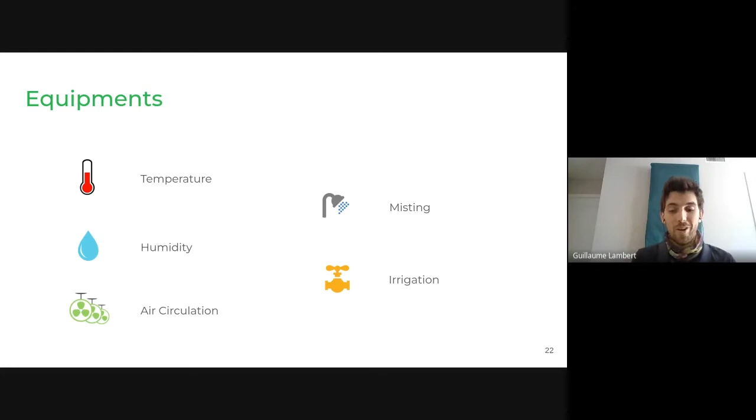So here we have heating devices or furnaces. What we see most are propane or natural gas, but more with carbon neutrality for 2050, there's more and more states that subsidize electrical heating as well. So that's becoming more and more important to know about when you're looking for heating systems. And then biomass exists but is more expensive, so I'm not going to talk too much about that here.

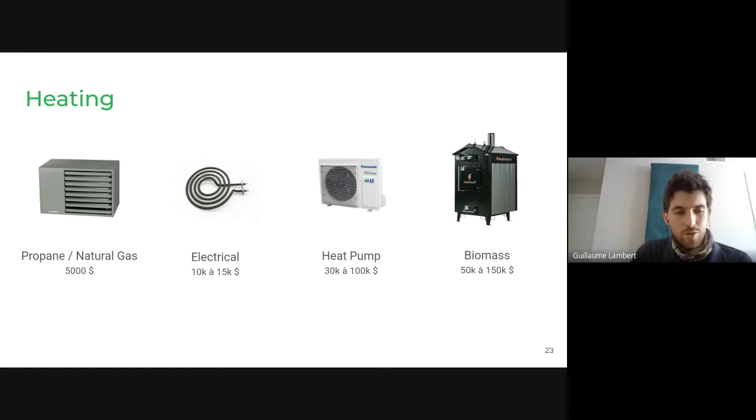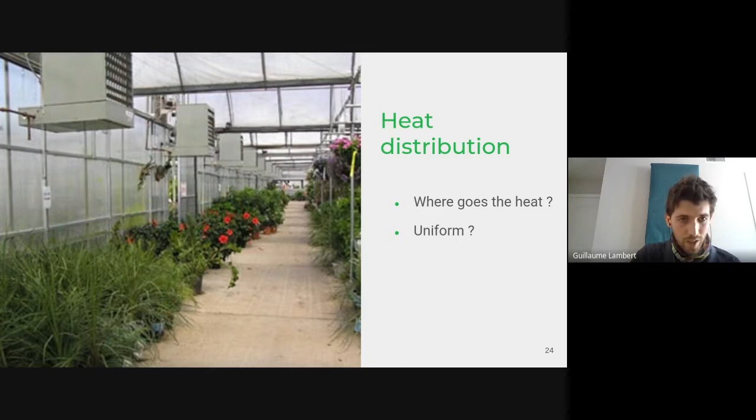The other part of this kind of heater is uniformity in the greenhouse. That's very important, so that you can control efficiently and know when to harvest, and we want every plant to be pretty much the same. With this kind of system, it's hard because it's really localized heat distribution.

Second important equipment is ventilation equipment. There's two types: mechanical and natural ventilation. Mechanical are basically fans that push air into the greenhouse or out of the greenhouse. Not going to go into too much detail here.

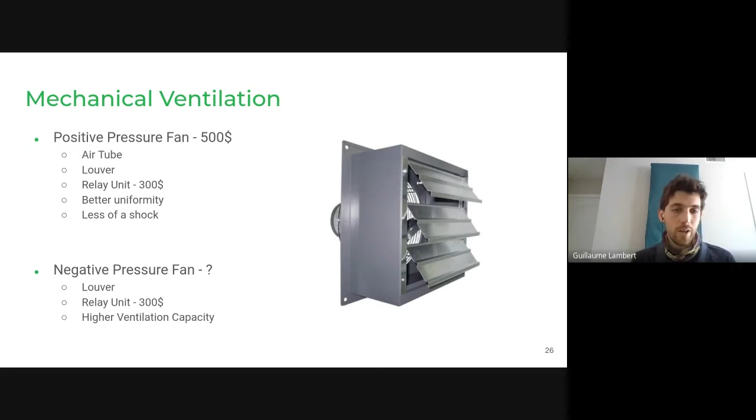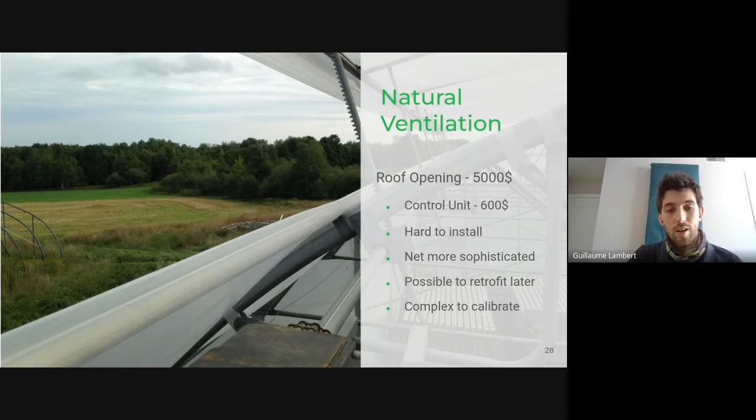Then natural ventilation - what we see most of the time are side curtains. It's a motor like this that will just roll the poly of the greenhouse, creating an opening for the wind to come in. The other option is roof openings like this one, but it's really more expensive and harder to install. But it's easier if you live in a place where there's snow and ice that gets the side curtain stuck or cold at the beginning or end of the season.

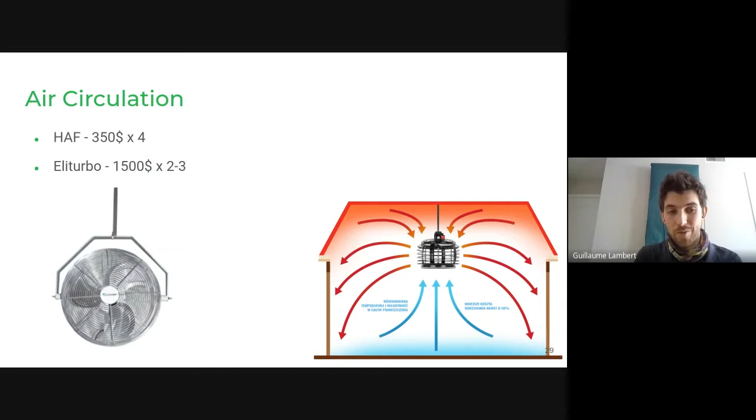After that, air circulation. What we see more often are HAFs, or horizontal airflow fans, which is the one on the left here - typically we see maybe 4 of them in a greenhouse. They're set up in a way where they make the air go in a circle in the greenhouse to make sure everything is as uniform as possible. But there are new systems we're starting to hear about - Eliturbo is a brand, but it's the one on the right here, where it takes the air from the top and brings it back down. So if you have a heater system like the one we saw earlier that's at the top of the greenhouse, this can help maybe. I'm just suggesting you ask your suppliers if you have questions about this equipment, since it's not my field of expertise.

Then irrigation and misting - we have pumps, pressure tanks, solenoid valves. Obviously there's a lot of fittings and other stuff around it. But what I wanted to say is that most of the time, what we do is not automating the pump itself - it's really automating the valve. The pump is set up with a pressure sensor that makes it start the second there's not enough pressure in the irrigation system. So basically we're just automating the solenoid valve. One warning maybe - when you set up your things, just make sure you don't put your irrigation stuff next to your electrical panel, because if there's a leak or something, that could end up with bad problems.

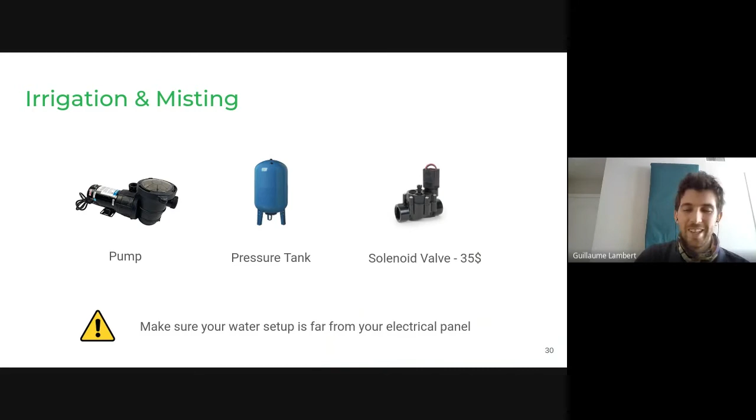Okay, so now sensors. There's a few sensors that we see in small greenhouses. The first one, the most important one, would be the temperature and humidity sensor. Some systems don't have the humidity sensor, or you have to buy it extra.

That's fine, but it's really important that you have humidity monitoring, because that's the big challenge in greenhouses. Temperature is quite easy to control, but it's really the humidity that causes more problems, because it's not as natural to control. Just keep in mind that you need to have a humidity sensor with your system.

After that, there's a lot of things that are interesting to know about the sensor. If it's wireless, it's easier to install, but make sure to know what's the range of the wireless system, and also what is the battery lifetime, because you don't want to change the battery every month. You want less maintenance, not more.

There are two types of sensors. You have electronic sensors, which are cheaper, and you don't have to do anything to maintain them. But the problem is that with time, the humidity sensor is going to drift and become way less precise. And it's less precise from the start as well.

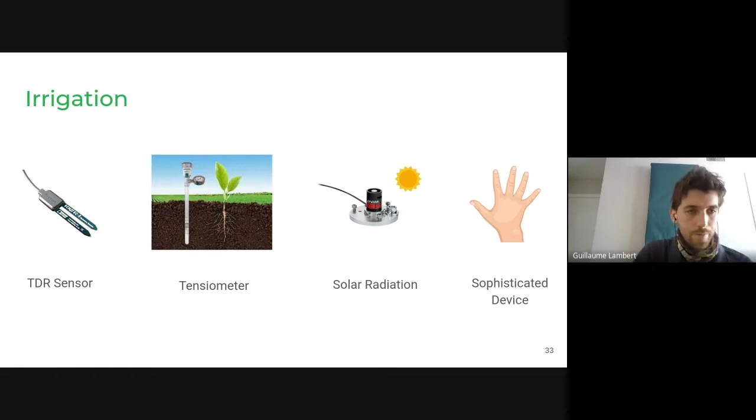I'm going to talk about the different sensors a bit more later. For the outdoor weather sensors, we typically see wind, rain, solar radiation, and then temperature and humidity. Those have different uses, obviously.

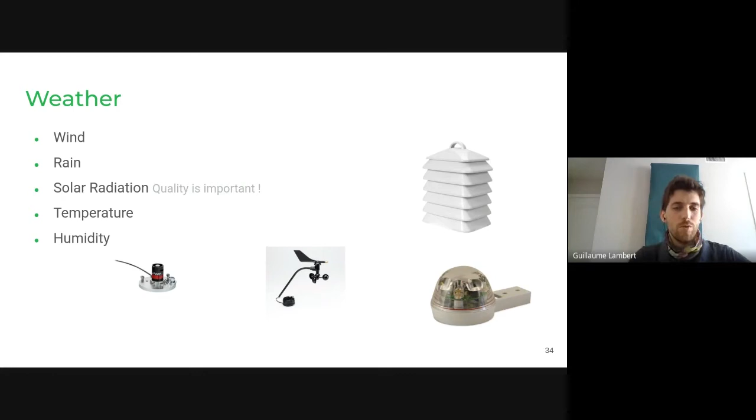But I'm seeing the time pass, and I don't want to go too far into details here. If you have questions, just do not hesitate.

Okay, so we're getting to the heart of the automation, like the brain of the automation. How do we control everything, and what does it look like? For the automation brain, the system you use, here are a few tips to check when you're looking at the options for automation systems.

You want to check if there's remote access. As I said, most systems offer it nowadays, some with subscription, some without. So you want to make sure you have it if that's something that's important to you.

Then I think the most important thing is if the system is easy to use, because we often saw people with super sophisticated systems that were quite expensive too, but since it was too complicated, they wouldn't use it at its full potential, and then they would just lose a lot of money because they're not taking advantage of all the features that they need.

More often than not, people are scared of changing something because they're scared of messing things up. And since it's complicated, it takes a lot of time, so you don't want to get into that. My advice here is to find a system that is not too complex, that is easy to use, and that you won't be afraid to make changes with, because during the season we don't want to always have the same settings.

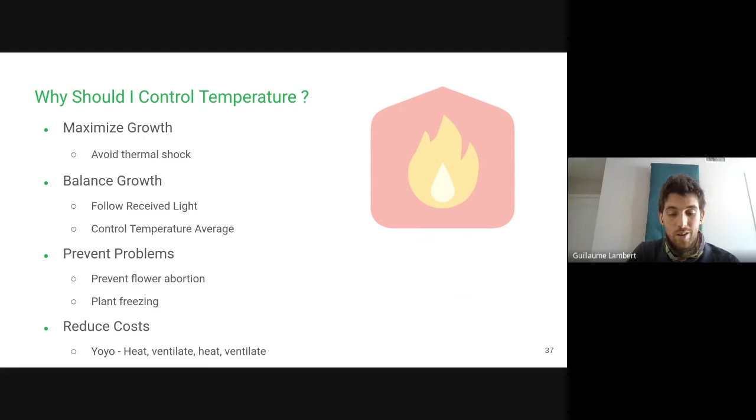Then preventing problems: when we go into extremes, if the plant is freezing, it's going to die. If it's too warm in the greenhouse, the flowers are going to abort, so then we're going to lose yield, and that's not what we want. Ultimately, reducing costs: what we often see with automation systems is it's really hard to find the right configuration. What we often see is a greenhouse that will heat because it's too cold, then get too warm because it's not reactive enough, then cool again. It's going to ventilate to cool down, temperature goes down, then it's too cold so it heats again, ventilates and heats and ventilates, and it's really not efficient - we're losing a lot of energy this way. That's what we want to avoid.

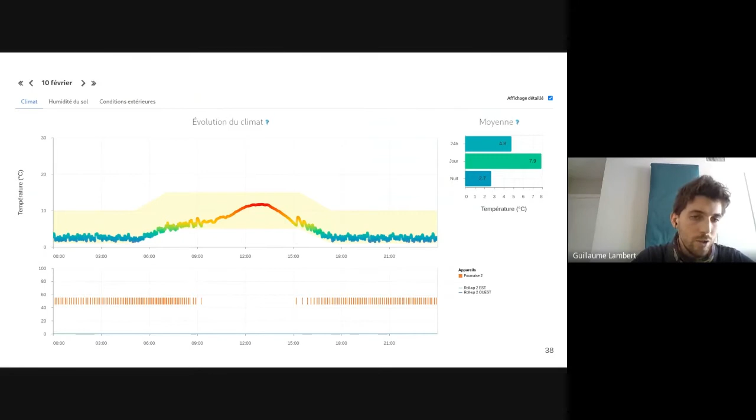Here's an example from one of our customers. On the top part of the plot, you have a yellow band representing the target the farmer wanted - the interval of temperature that was okay for her greenhouse. On the lower part, the orange lines represent the heater running. We can see the temperature was oscillating during the night, and during the day the sun was keeping it in range. The oscillation, to give you an idea, is about 1 degree Celsius - that's a decent precision that we see in greenhouses for a customer.

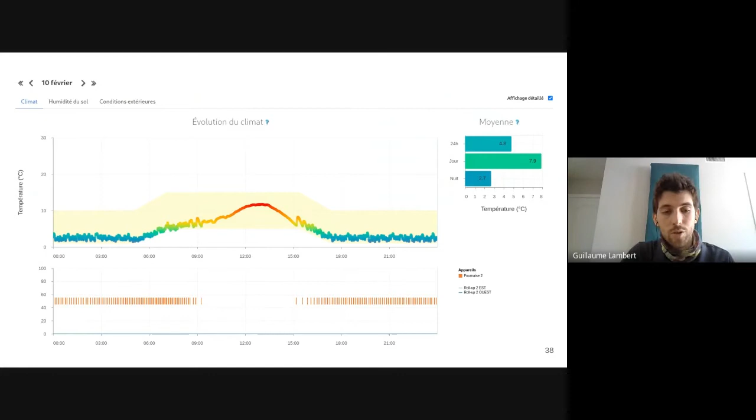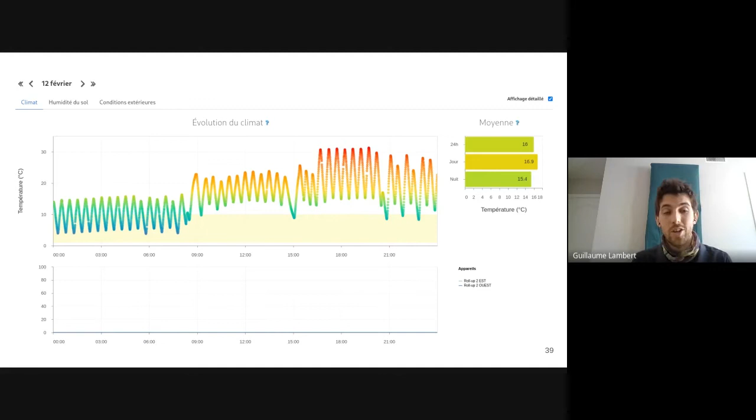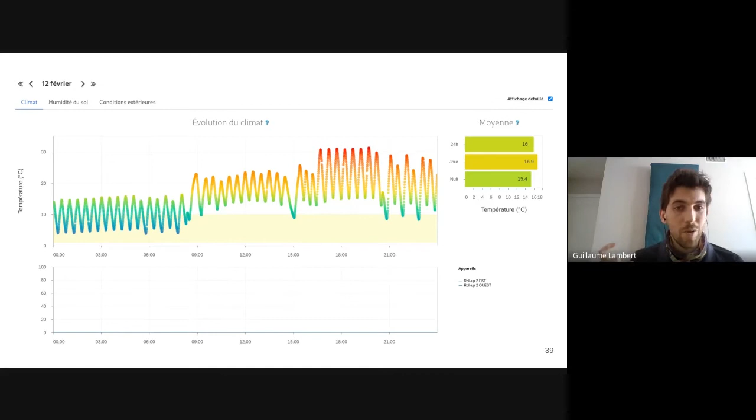I wanted to compare that to the same greenhouse but controlled with a home thermostat, which we often see in greenhouses as well. Here's the difference - the thermostat was on a different target, but we can see it was oscillating a lot. At its worst, in an hour the temperature changed by 20 degrees Celsius, so 36 Fahrenheit. That's a huge temperature swing that plants will suffer from, because when it gets too hot too quickly it causes humidity to drop, so the plant feels super dry, and when temperature goes down, humidity condensates and creates moisture on the plant, risking fungus problems. This big swing of temperature is something we want to avoid in the greenhouse, so we want something more reactive than a thermostat.

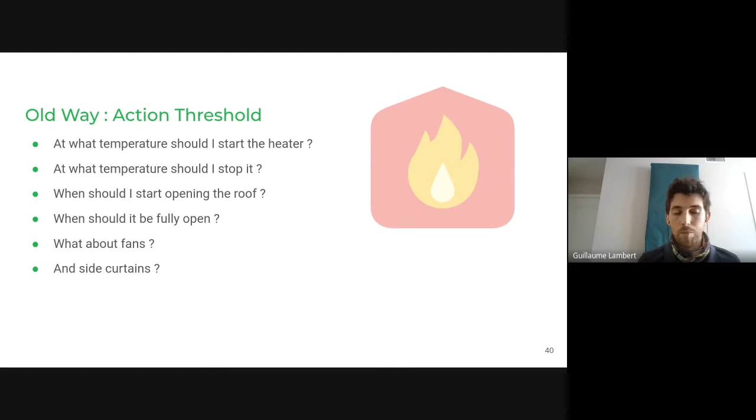Okay, so how do we control the temperature then? There's kind of 2 ways of doing it. The typical way, or I call it the old way, is action threshold. Basically, we give a threshold for every action that we want to happen. For example, at what temperature do we want the heater to start, and at what temperature do we want it to stop? Then we have to figure ventilation as well. So when should we start opening the roof, and when should it be fully open? What about the fans and side curtains? So it's a lot of questions that we have to ask on how we should control the equipment so that we'll get decent temperature.

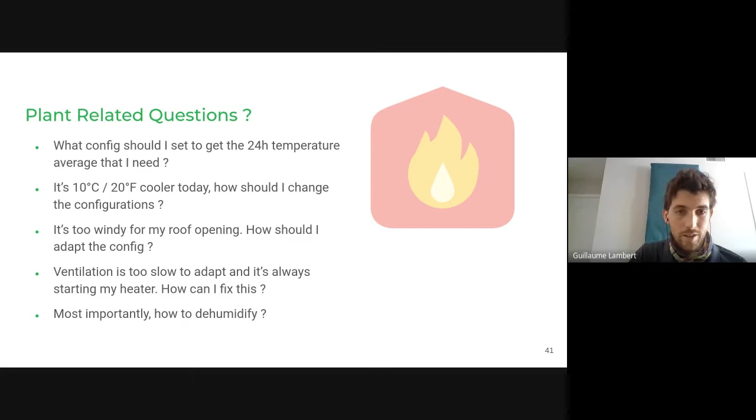And then there's another layer on top of that. So what config should I set to get the 24-hour average that I need for my tomatoes, for instance? And if it's 10 degrees Celsius or 20 Fahrenheit cooler today, how should I change the configuration so that I will avoid doing the yo-yo I was talking about earlier? And if it's too windy and I have to block the roof, how should we adapt the configuration so that the temperature is going to be maintained properly? There's a lot of questions there that farmers have to ask themselves.

That's what we faced when we were working on the system in the early days. We were in the greenhouse doing a lot of tests, trials and errors, and we realized that doesn't work. It doesn't make sense that every farmer has to go through all those trials and errors. It's just taking too much time, and it's changing all the time. So it's not a good way of doing things. That's when we realized that we have to find some other way of doing it.

And that's when we came up with the smart targets system. So instead of having to tell the system what every piece of equipment in the greenhouse has to do, it's more about how we just give the system a target, and then the system will figure out itself how to use the equipment. So the goal here is to put as much expertise in the system so that people don't have to figure things out themselves and lose a lot of time in trial and error. And with that, there's a lot of optimization that could be made as well. So that's the second way.

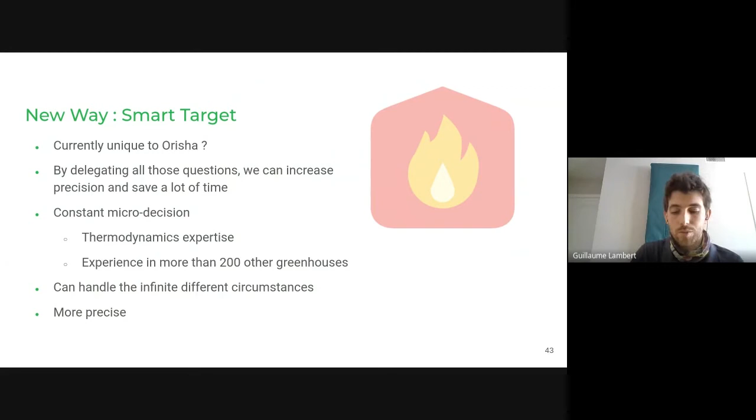That is smart targets versus action thresholds. So how can we save more time while automating the temperature? Well, avoiding trials and errors, as I just mentioned, we don't want to have all those questions to answer. And then, as I said, the temperature has to follow the light received by the plant. So if the system allows us to follow that without reconfiguring every day what we want in the greenhouse, then that's another way to save time.

And ultimately, if you have some constraint on your equipment, so if you don't want the roof to fly away because it's too windy, then you can use a sensor, like the wind sensor, to automatically close it when there are storms.

This is very important, and no matter what system you use, there's always a risk of failures. And if it happens, you don't want to lose your crops, obviously. So an easy way to protect crops from the cold is to just plug a home thermostat in parallel on your heaters. As I said earlier, it's really not precise, but if your main system fails, it's going to keep your plant alive, even though the growing conditions aren't going to be optimal. This is really a cheap and completely redundant way of protecting your crops, so I really highly recommend it.

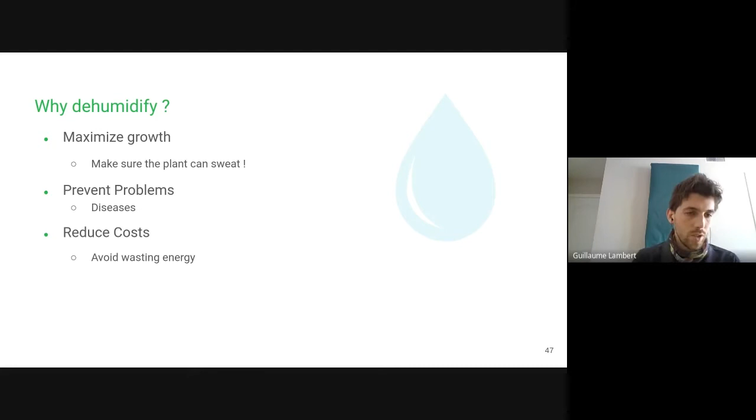The last one is reducing costs. Once again, since we control it with heating and ventilation, we don't want to use too much energy for nothing. We want to avoid wasting energy, and there it's the control logic that will affect it, and that's quite tricky.

First thing to know with humidity control is that we don't want to use the relative humidity, which is in percentage. That's the humidity that we used to. So if it's 80% or 50%, that's what we as humans used to talk about humidity in this form.

For plants, it's different. Plants don't feel the humidity the same way as we talk about it. So relative humidity is no good, we don't want to use that. We want to use humidity deficit. Maybe there's something else you might have heard of, which is vapor pressure deficit. Both are good, but I'm just going to talk about humidity deficit, but the same principles apply to the other one too, called VPD. Maybe people have seen the abbreviation somewhere. Humidity deficit is going to be in grams of water per cubic meter.

If you're not using the plant language, the problem is you're going to either need to sacrifice the plant needs, or you're going to need to constantly change the humidity configuration, because relative humidity depends on the temperature if you want to know what the plants feel. So you always have to do a conversion in your head and on the system. That's something you want to avoid.

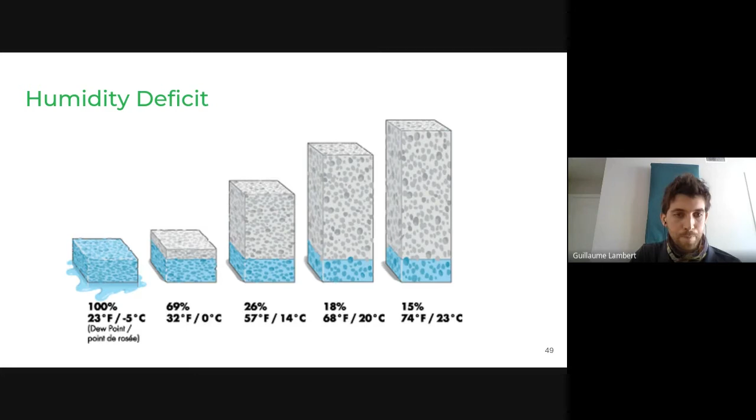So once again, there's kind of two ways of doing it. The first way, what people were doing before, was doing overrides—either manually or some system allows you to create overrides in the configuration.

So what people were doing was just: we open ventilation, we start ventilating either with fans or with natural openings, and we heat at the same time. The goal is to expand the sponge and bring in air with less water in it.

So either people were doing this once at sunrise, or they were programming their system to do pulses—a small amount of time heating and ventilating, then waiting, then starting again. This feels like we're losing a lot of energy when we heat and ventilate at the same time, which is true.

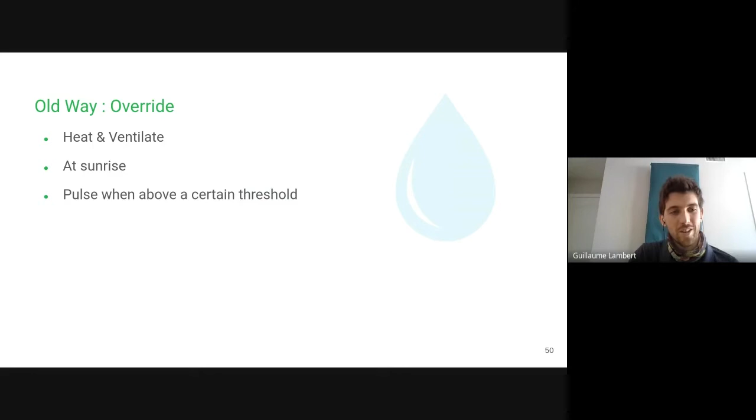But the output you'll see on your yield is really worth it, because you're going to avoid a lot of problems with diseases, and you're going to increase the capacity of the plant to grow. You'll avoid the plant just shutting off and stopping growing.

When we control that manually, what's complicated is: if we want to be efficient, when it's more humid outside than inside, it's kind of hard to follow whether we should ventilate or not. If it's too hot or too cold outside, it's going to affect the plant—the temperature of the greenhouse can become too low or too high. What do we do in these cases?

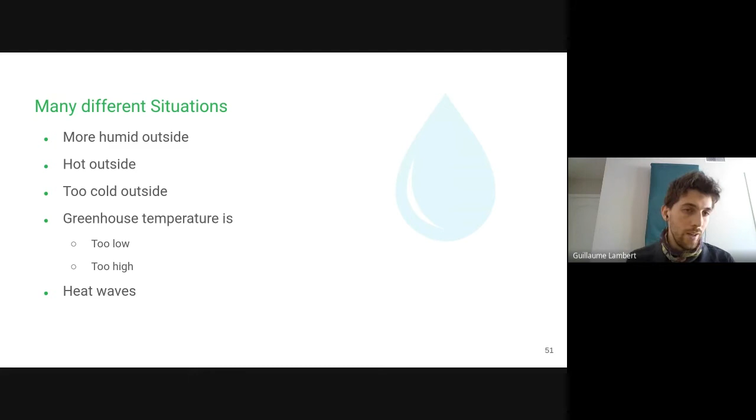And then when there's heat waves, it's hard to dehumidify, and what should we do then? There's still a lot of questions. Maybe the biggest one is: how do we control temperature and humidity at the same time, since they're interdependent but use the same equipment?

So the second way, instead of overrides, you can use the smart target approach—basically delegating the complicated stuff to the system, then making micro decisions based on thermodynamics and experience developed on a lot of greenhouses. That's the cool thing with this approach. I think we're the only one doing that right now, but most likely other companies are going to pop up with similar approaches.

So how much time do we need to adjust the system and control humidity? I'd say you have to change things anywhere from often to never, depending on the system you use. If your system is using relative humidity—percentages—you're going to need to change it a lot depending on the temperature in the greenhouse if you want to do it properly. It's going to take a lot of time.

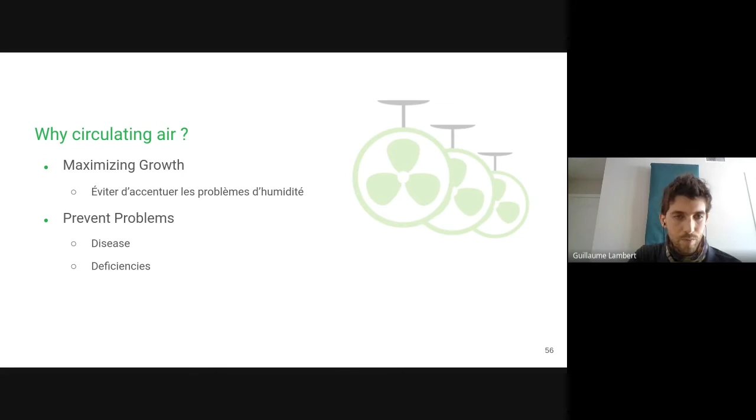If these pockets are too humid or too dry, the too humid pockets stop the plant from sweating, causing deficiency problems, especially with calcium and another one I'm forgetting right now. That's pretty much what I just explained, but there's a study made about humidity in the greenhouse.

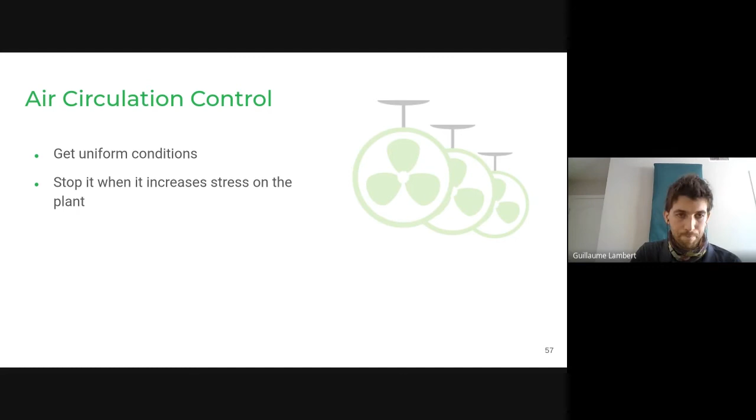Comparing when it's too dry versus the right humidity, they found a difference in yield of 10%. That study wasn't about air circulation, but it's still related to the humidity it controls. So how much time do we need to control that? Typically people let it run 24/7, but the problem is in summer, as I explained. We tried to develop a feature that would stop the air circulating fan without having to think about it. If you do it manually, you need to think about it during summer, but the rest of the time you won't. Typically, if the system does it for you, you don't have to think about it.

Misting can help because some insects and pests struggle living in more humid environments, while the predators we use to control these pests are more comfortable in humid environments. So using misters can help control undesirable insects. But the problem is if we put too much water in the air, it can cause fungal problems. So that's a balance we need to find - which is the least worst problem. Sorry for that bad English.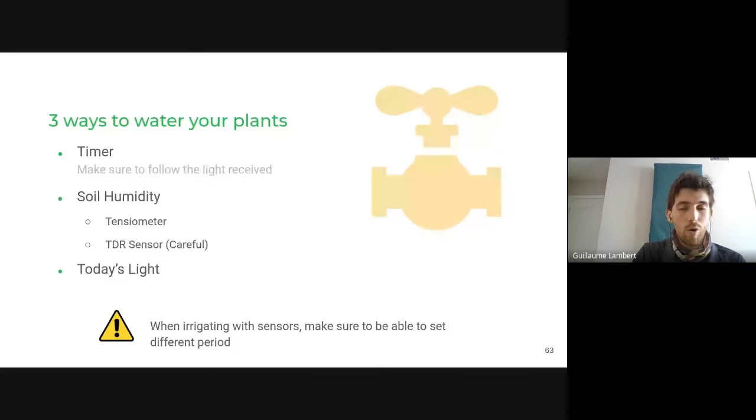Here I put a warning again: when you're using sensors to irrigate, make sure you can set different targets or thresholds depending on the time of day, because once again we don't want it to start during the night or early before night.

Recommendations: if you're looking for the cheapest option, timers work quite well if and only if you can have different scenarios of timers. You don't want to reconfigure it every day, but if it's sunny one day and cloudy the next, you don't want to send as much water to your plant, because it's not going to need it, and then the water will sit in the ground and rot, basically. You're going to have problems. So timers are interesting if you can relate the amount of water to how much light the plant has received.

The most precise option is tensiometers, but once again they're finicky to use, so it's a bit challenging and takes more time to get started with those. The most efficient, I'd say, is using pyranometers, basically a solar radiation sensor, which gives good estimates you could use to irrigate. I'd add tensiometers so you can diagnose how long you should irrigate at a time.

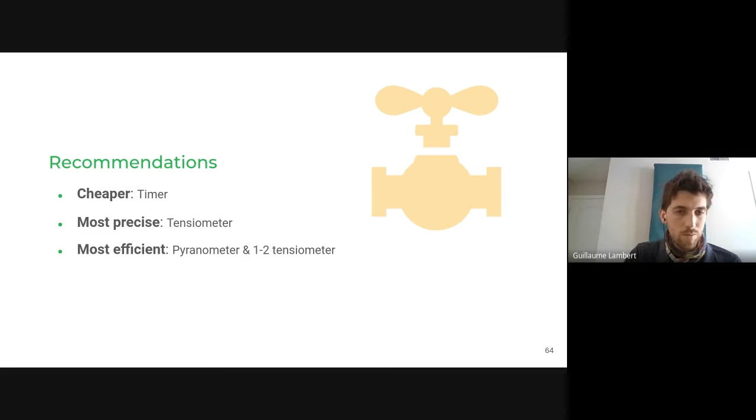If you see that in your greenhouse two different tomato or cucumber plants don't look the same, and you're wondering why when they all have the same conditions, sometimes we don't see it in the ground. So having tensiometers to poke in the soil lets you see if both places are equally humid, or if there's a spot that, because of a slope or something, gets all the water. Then we can avoid problems by knowing that. So it can be interesting to diagnose problems like this.

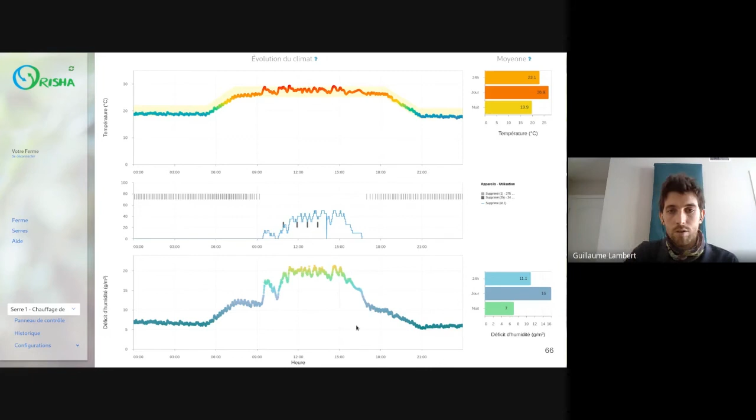And this is one we chose to do - a visualization like this without any configuration, so it can be really easy to have a quick overview of what happened during the day. You don't need to configure anything, and with two clicks you get all this information. There are other pluses as well, but this is the main one.

The difference is you have other systems, like this one here, that took another approach and decided to allow more customization. But the downside is it takes more time, because every time you have to enter what graphs you want - the configuration, data interval, start date, and so on and so forth.

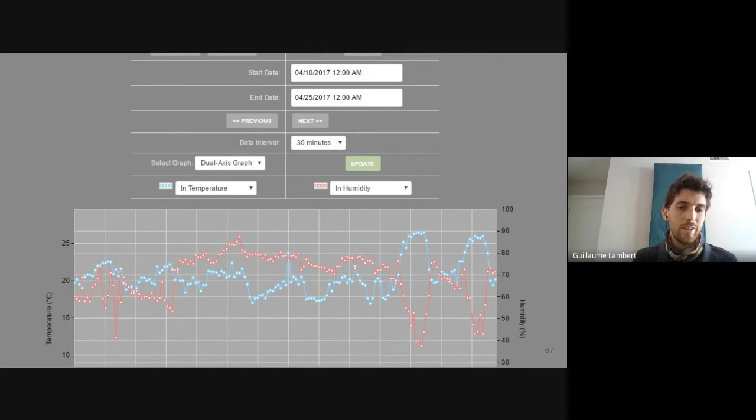So if you're a geek for data, you maybe want more control like this one. But as I said earlier, otherwise we want the easiest solution possible. That would be my advice, because we want to really take the habit of checking it, and if it's too complicated, we won't.

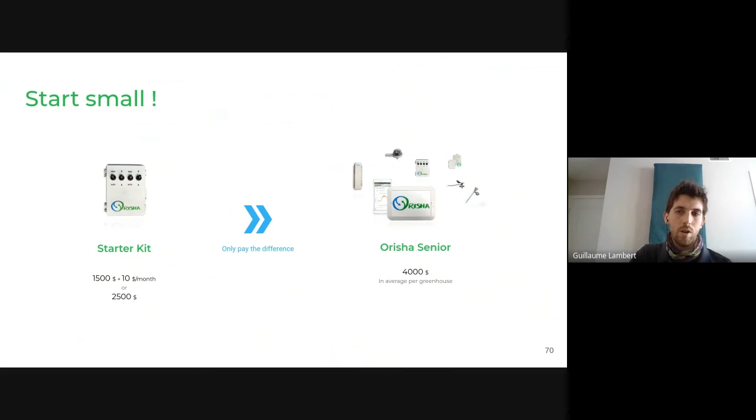What we decided to do this year is offer a simplified version of the system, to allow people who are starting out and have already a lot of investment made to wonder if doing it manually won't be a better option, because automation is still another expense on top of everything, another investment. So we went with a simplified version that would be easier on the cash flow for people who want to start up. And if you want to upgrade later to a better version, the neat part is you only pay the difference between the two systems, so you don't need to throw away the first one and buy a completely new one.

I'm sorry, I forgot to plug my laptop. Making sure it won't die.